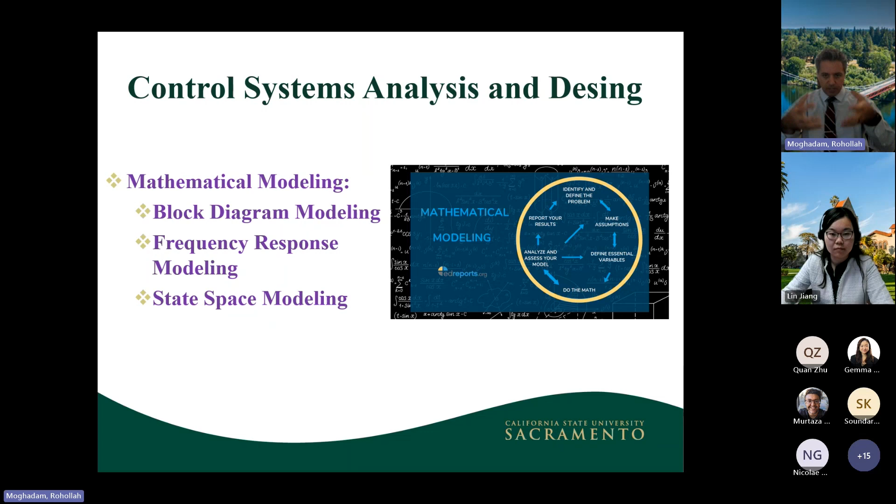The next step is system analysis. Whenever we find the mathematical model of the system - which comes from the physical representations or differential equations we get from the system - we find out system specifications like system speed, settling time, peak time, and characteristics such as the frequency of oscillation of the system.

Now we need to perform some analysis and observe what's going on in the system. So that is what we have, time response analysis, or analysis in terms of stability. The main part of the analysis is to observe the system behavior in different circumstances. We want to make sure that the system behavior is desired.

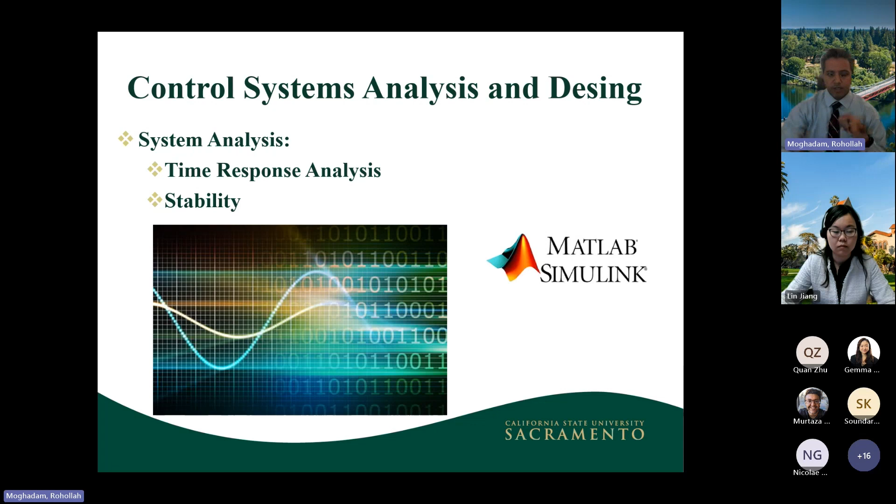So the designer needs to make some changes in the system behavior, or it's fine and you don't need to make any effort in designing a controller. So the last part is the controller design. Most of the time you check the system, find the mathematical model, do the analysis, and you find out that this system is too slow.

The system needs a lot of effort to modify. It's too slow. We need to have a faster system, or the system has lots of oscillation, or even the stability of the system has some issues. Then we need to do the controller design.

So we have to define some sort of PID controller, or it depends on how complex the system is, if we want to do optimal control, or if we want to apply some machine learning approaches, working on reinforcement learning or neural network based controllers.

In the Bay Area, Sac State is a university that is well known more in the power area. We had lots of meetings with the advisory board from different companies. Right now, companies in the utility industry are looking for students with PLC programming skills and also an understanding of PID controllers.

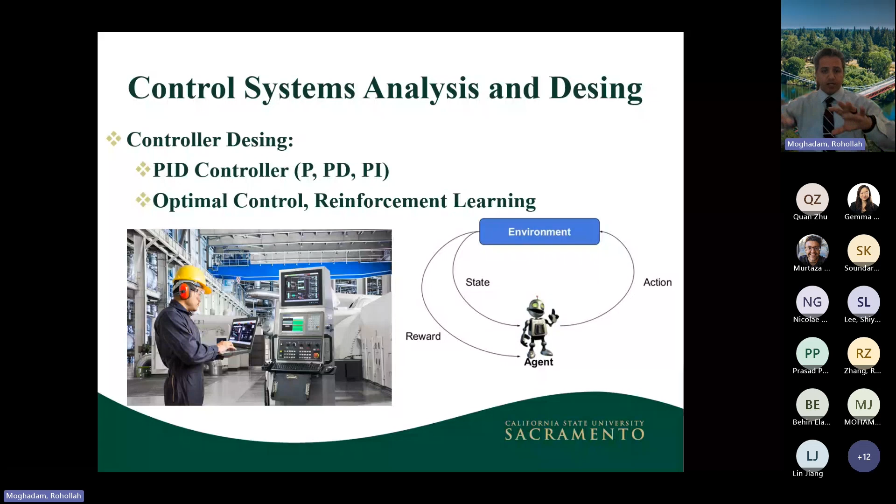So these are three main elements in the system analysis. I have been working with Quanser since 2017, late 2017, 2018, when I was in my PhD, and I worked with the Quanser coupled tank and the Qube-Servo.

The good thing about Quanser, which I have been working with, is that all this equipment is educational based, and they do have the courseware that helps the instructors a lot. Many labs are already involved and already developed, and they have the simulation, which helps the student. This is what I have been teaching in the control system laboratory and even the courses.

So when the students feel that there is a direct connection between the math and the application, that is when they understand the main concept - what the controller can actually achieve, how the controller improves the performance of the system.

That is what I have noticed, that many of the students don't have any idea about this when they take the control systems course. It's just a lot of math involved, going through frequency response analysis, time analysis, linear algebra, going through stability and lots of those concepts. And it's just simple math, all right?

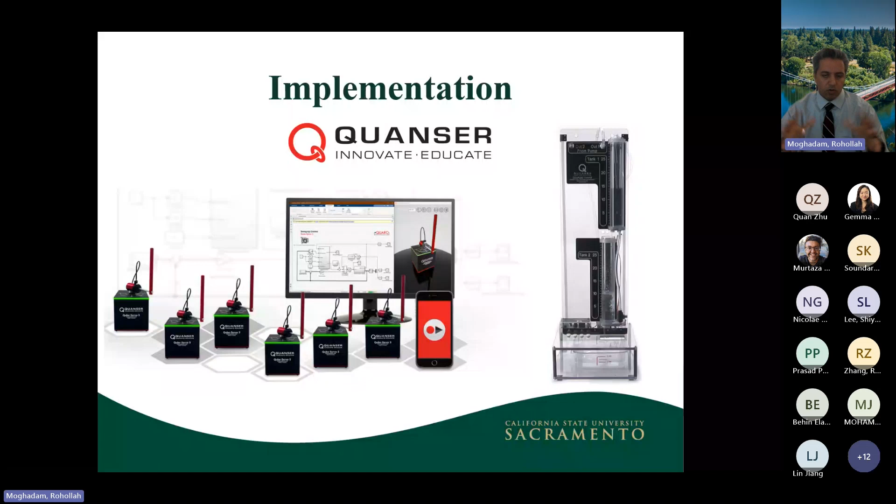That is something that actually closes the loop of the learning, of the educational part, from the theory to the application. And that is what Quanser actually helped a lot with in my courses, like in the control systems and robotics.

So at Sac State, I actually started working with the Qube-Servo 3, and another great feature that Quanser provided for me was the virtual Qube-Servo.

So the virtual Qube-Servo actually is the environment that has the same characteristics as the actual one, but it's virtual. So normally what I do in my classes is give the students access, because it's something a student can just connect through MATLAB and then download the packages and software through Quanser.

And the student can do everything at home whenever they can apply all the control concepts that we talk about in class. They do the simulation, apply it in the Qube-Servo, and then when we go to the lab, they apply their model. This gives them the freedom of applying anything they want to the hardware, because with the actual hardware we should not make the system unstable, since there are some limitations for the system. But I let students go ahead and try that in the virtual part.

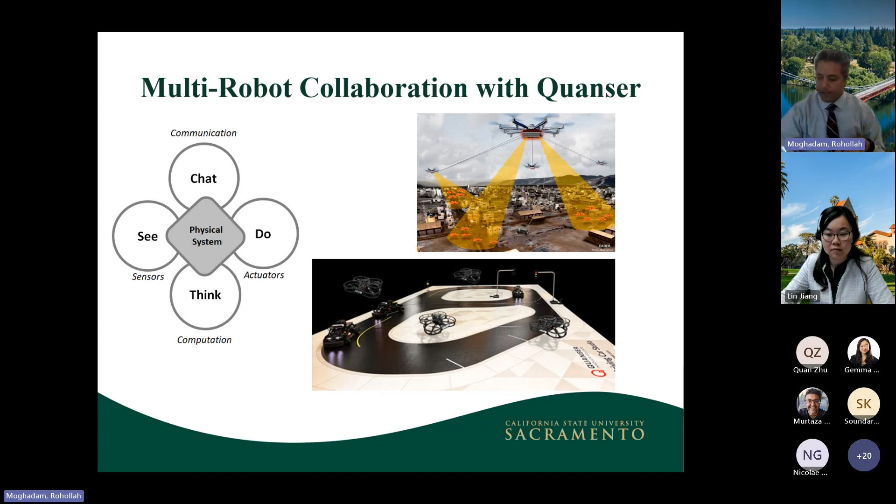I think I have about 19... I have about 30 seconds. So Murtaza, if there's anything that I need to do, or just stop sharing.

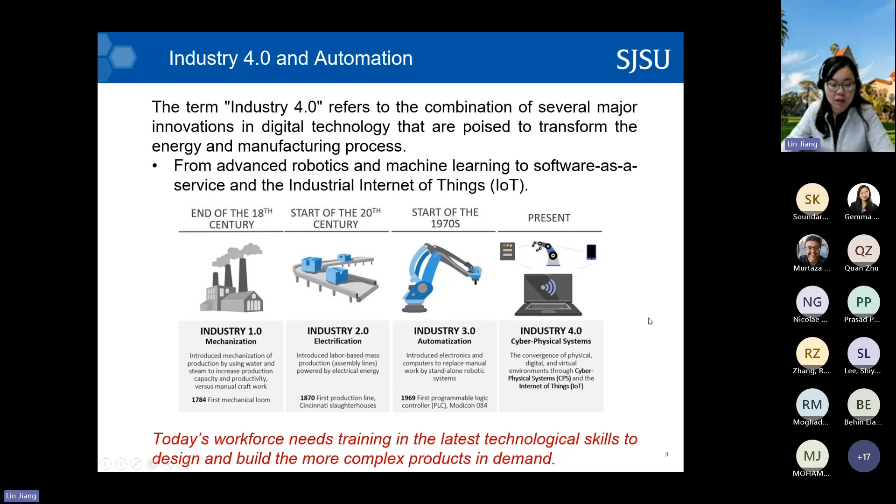So based on that terminology and based on that requirement for our future automation and manufacturing, today's workforce, or our students, which will become future workforce, needs training in the latest technology to design and build more complex products in demand.

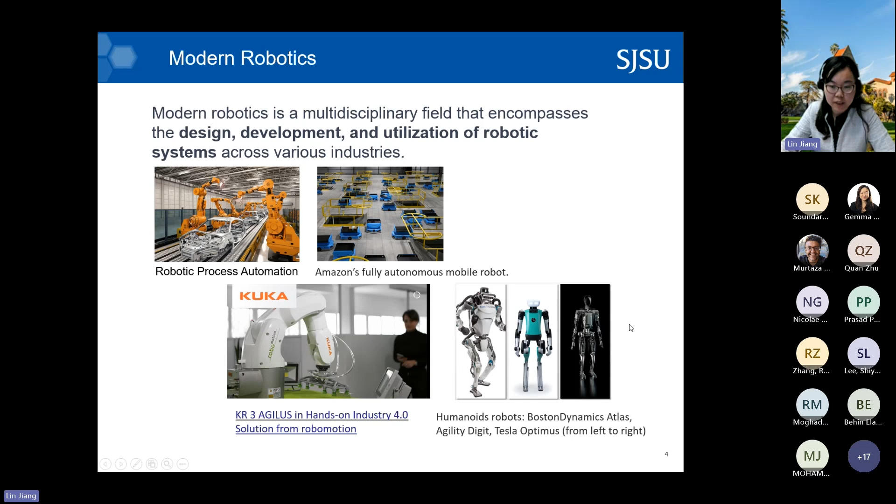Modern robotics, as we all know, is a multidisciplinary field that is a combination of design, development, and utilization of robotic systems around various industry applications. We know that there's a lot of automation in car factories, and Amazon also developed mobile robots. KUKA provides hands-on Industry 4.0 solutions for collaborative robots. Also, humanoid robots can help humans for some rescue applications, and for applications that require working alone with a robot for demanding tasks.

Cooperation is another level for human-robot collaboration. Cooperation means that, for example, the humans are delivering something on the conveyor belt and the robot picks it up and then operates on them.

Collaboration, which we are going to talk about in today's seminar, is also a future trend for Industry 4.0 - the robot and the human working together with each other. The robot is like an assistant to the human. So the research trends in human-robot collaboration and interaction fall into these couple areas.

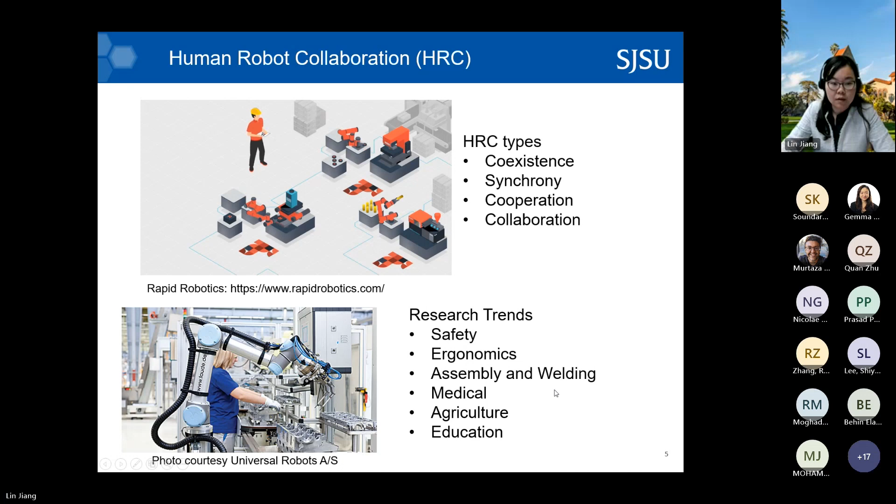In our classes, graduate or research activities, or undergraduate research or class activities, we were always talking about integration. So it's not just that I am very good at programming or very good at hardware tools. For a future workforce ready for a career in robotics or control systems, system integration or technology integration is very crucial.

We will have to have the knowledge from our education and training. We will need to know how we can utilize our tools, not only software tools but also hardware infrastructure. Then we integrate all these together, and we understand how to interface the hardware with our software skills. This capacity will bring us to the top of the pyramid, which is technology integration, and make us ready for the future workforce.

Regarding system integration, I always request my students to pursue this, because the future workforce will require us to have technology integration - not only basic knowledge, but also how to interface with software and hardware infrastructure, and then build our capacity for the workforce.

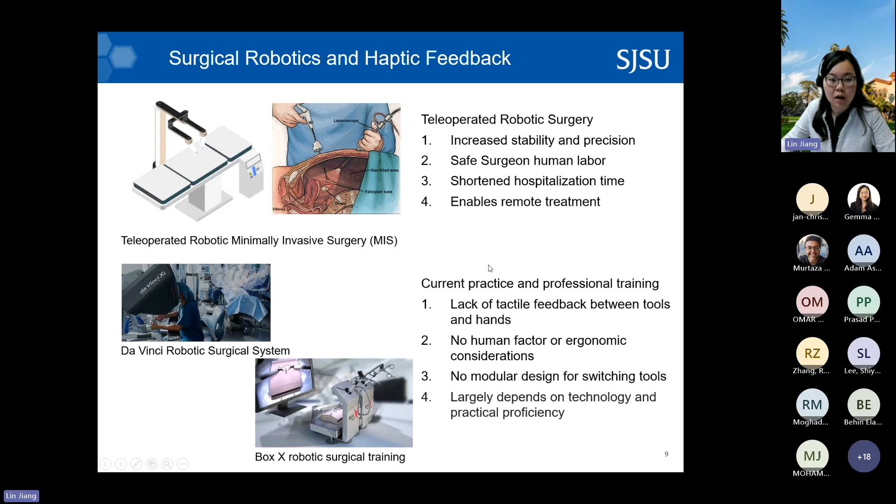One of the projects we've worked on and published at ASME IMECE 2023 is a modular tactile end effector for a collaborative robot. Most surgical robot arms are equipped with collaborative arms. We want to know if we can design something that easily lets surgeons or clinicians switch the end effector, so a collaborative robot can sit at the clinic as a tool.

Our preliminary work designed a load cell for end effector tactile sensing, a linear actuator that controls the surgical forceps, and an endoscope threaded through the forceps to see how they open. We used MATLAB to simulate the robot movement, the Jacobian matrix, and joint values, and then control the end effector.

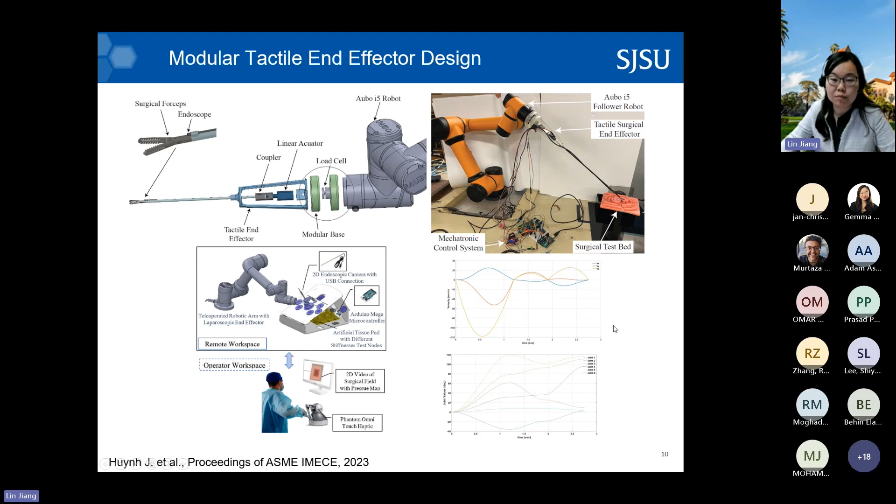Here is a demonstration video of the modular end effector when it's moving. The MATLAB robotic toolbox gives us a really good platform to simulate and virtually see how the collaborative arm moves in 3D, helping us design our trajectory. Based on the trajectory, we can feed it into the robot control.

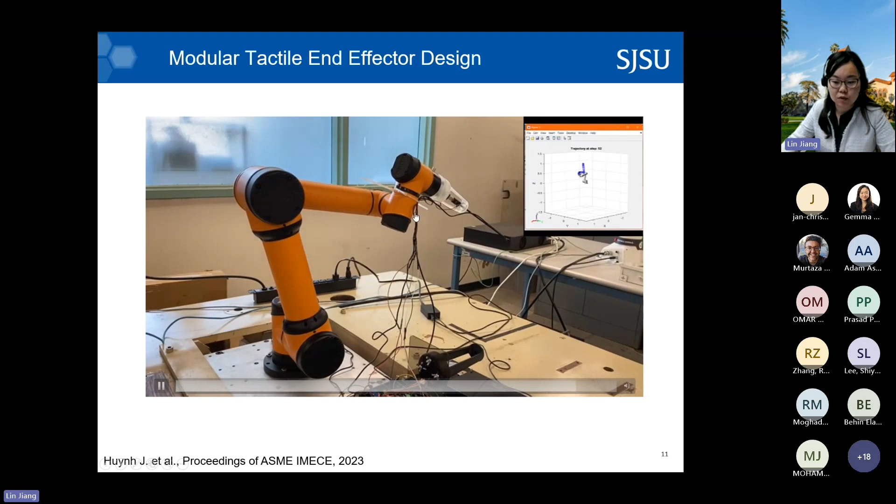Another research project we're doing considers human-centric haptics and virtual reality feedback. We're not satisfied with only the image feedback from the endoscope; we want to know how a human's decision is affected by what they virtually see. The goal is to track hand motion using a haptic glove based on a master-follower architecture. The idea is that I train myself with a trajectory.

After a couple of training sessions, I learn my learning curve through a machine learning artificial intelligence algorithm we developed, so I know how fast I will train myself to a specific trajectory. Next time I'm operating on-site with a similar trajectory, I wear the follower glove, and if I'm off track, the follower glove provides haptic cues.

The idea of developing a human-centric haptic glove integrated with virtual reality is to provide professional trainees a platform to train themselves at home with a desktop and a VR glass. This was also published in the Proceedings of the Human Factors and Ergonomics Society conference in 2023.

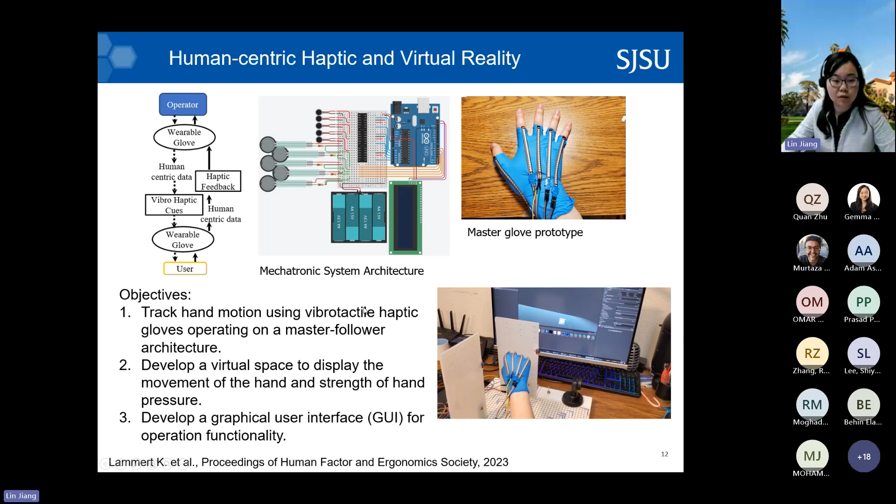Another project I've worked on, in collaboration with San Francisco State, uses the Quanser QARM and the Omni bundle from Quanser for robot teleoperation. The goal is to remotely control multiple robots with a haptic device and a clutch system, switching gear between different robots and operating from a remote workspace.

We are demonstrating the wearable glove with sensors we developed, an exoskeleton glove that we used. In the operator space, we control the haptic device. In the remote workspace on the QARM, we have a force sensor and a camera that tell us how far we go and what we're seeing on the QARM. That information feeds back to the operator, telling them the real perceptual information, and the operator makes necessary decisions.

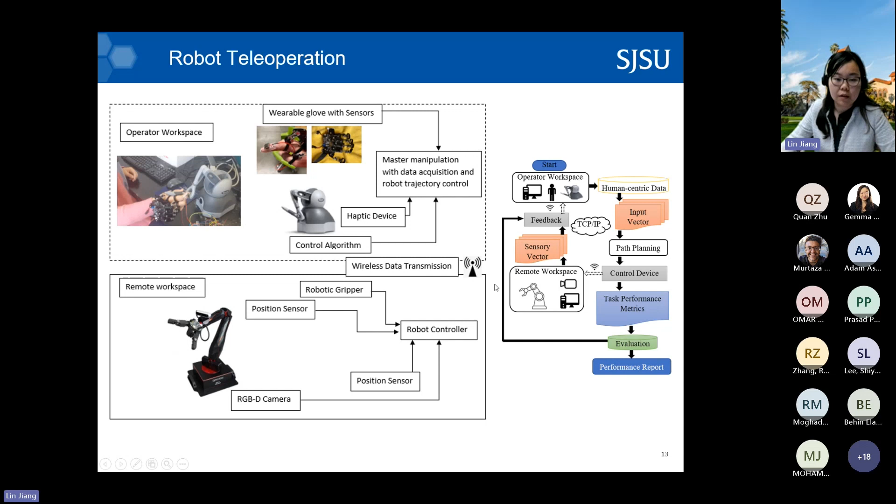Here is a demonstration video of using the Quanser robotic license with MathWorks MATLAB, controlling the remote robot at San Francisco State from San Jose State University.

Next, I'm going to talk about how we can empower future engineers, and what are the key necessary ways that we can train our students to professional excellence.

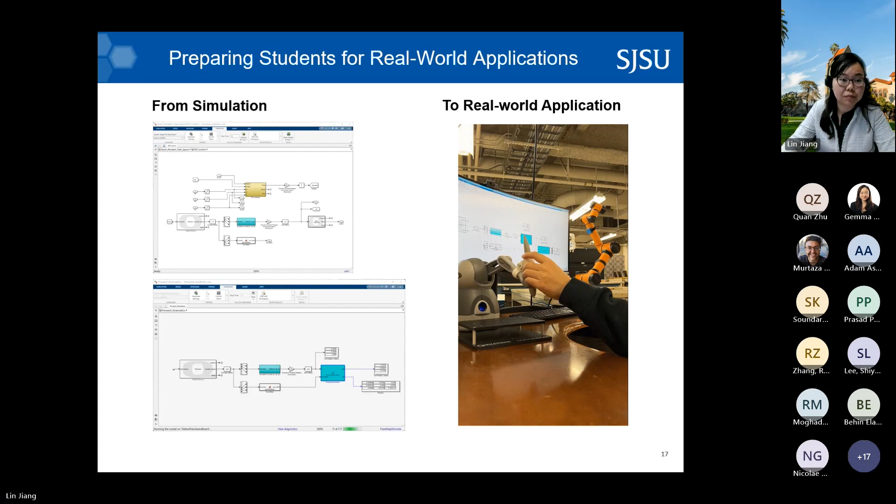I've also been talking with our DAC members, the Department Advisory Council from Industrial Engineers. There are some typical industrial-driven skills that they want our students to get prepared for.

The path to this new Industry 4.0 workforce: first, we want to know what are the needs for the skills, which we learned from the ASME ebook. Step two is to determine the technologies needed and prepare yourself and your courses, considering what are the learning curves for you.

Step three is to get hands-on training in system integration, interfacing hardware and software. Step four is early practice in real-world applications.

For example, in my lab, most of our students start working on lab projects in their junior year. Some students, one or two, start in their freshman year, which is also very impressive. So the earlier, the better. Early practice in lab activities, research activities, and interfacing hardware and software for real-world scenarios will help students learn better.

Step five is lifelong learning - continuously developing skills for an adaptive workforce, sustainably adaptive to the future.